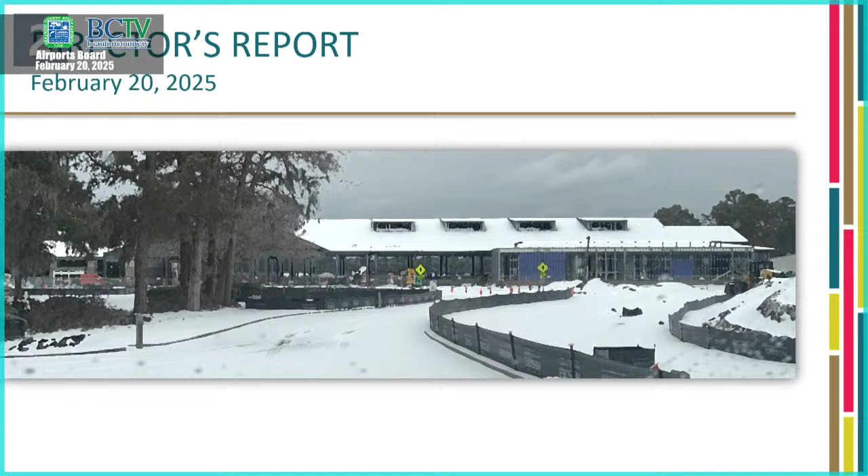Some new members: both Wesley and Joel are part-time firefighters at the ARF, and we hired them in order to try to reduce some of the overtime we have over there, because it's a 24/7 position with 2 folks on, and we end up running into overtime. So they're both actively employed by other fire districts in the county, but they were interested in coming over to us. They're just about through all their training, and they'll be ready to be full-fledged part-time ARF operators here pretty soon.

Just yesterday was the first day at work for Sandy. She is the 3rd member of our airport finance team. As we're taking more and more of that on at the airport, we need more people to help take care of that stuff. Sandy's going to be doing a lot of what Elena did before. Elena has moved up a position, and then we'll have Brian doing less of the day-to-day and more of the strategic, budget-related, project planning, outward-focused kind of activities that he's really gifted at. Happy to have Sandy there, I think she's going to be a great fit. We brought her in and let her see the budget yesterday, and she didn't run away screaming, so I think she passed that first test. Welcome to her, too.

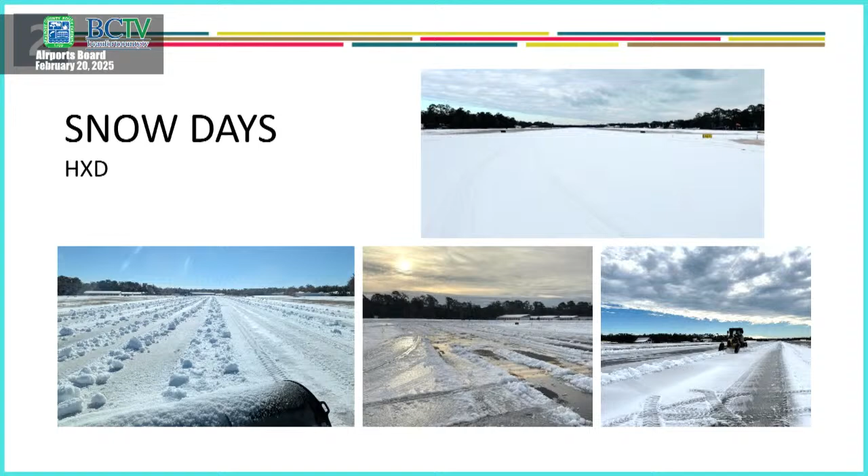So it's a little bit challenging, and it did give us a chance to think through contingency planning and what-ifing the scenario. We're not going to spend a lot of money and prepare for an event that may not happen for another 10, 15, 20 years. But if we find some product that has an extended shelf life, isn't a huge investment, and doesn't require a bunch of specialized equipment to apply, then maybe we look into something like that so we could prepare for an event.

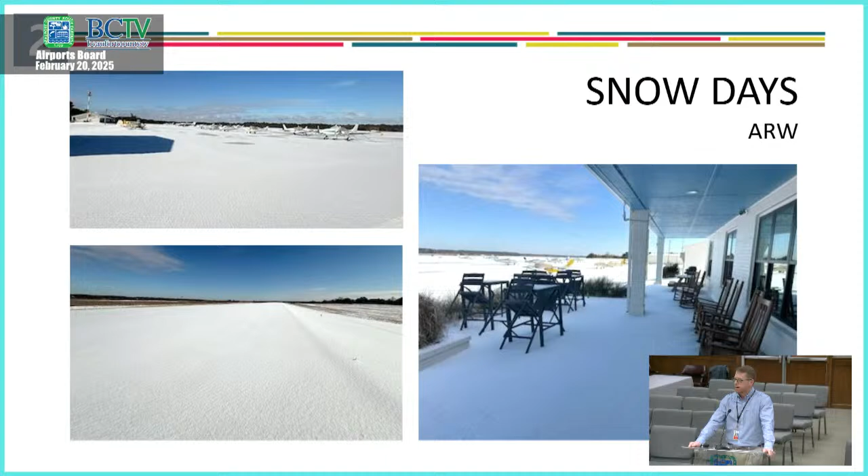There are pre-icing agents you can put down on runways and taxiways, but we'd have to look at the coverage, quantity, shelf life, all that good stuff. Because it just doesn't make sense to buy snow plows and snow throwers at an airport like this in this area — and you see that everywhere, nobody has it. Charleston cleared because they have the Air Force, and the Air Force relocated equipment since they don't keep equipment there either. So it's a challenge.

One question for you, John — do we know what the anticipated loss of revenue was for that 3.5 day closure? This time of year is luckily fairly low because the airlines only have a couple of flights. So I don't have a number, but compared to a hurricane during tourist season, this isn't much. So if we had to take one, we'd take this over a hurricane for sure. Yeah, and that was my assumption.

So just considering future investment, I mean, I would — yes, it's a once-in-a-decade event.

Yeah, it would probably take 3 or 4 events to recover to make that cost benefit work, I would imagine.

Does the airport have any de-icing equipment? Well, we don't, the airlines do. They do? Yeah, okay. And they use it a couple times a year. Yeah, they have to de-ice.

One thing you might want to think about, and it requires a little bit of investigation, is up north what they do is they have multi-purpose vehicles. In New York City, they turn garbage trucks into plows, so they're only used for plowing during a snowstorm, but the rest of the time they're used for something else. And some of those little bobcats you had around here, if you had something a little bigger, those machines can cut the grass and potentially plow snow at the same time, just by switching the attachment. Yeah, that's true.

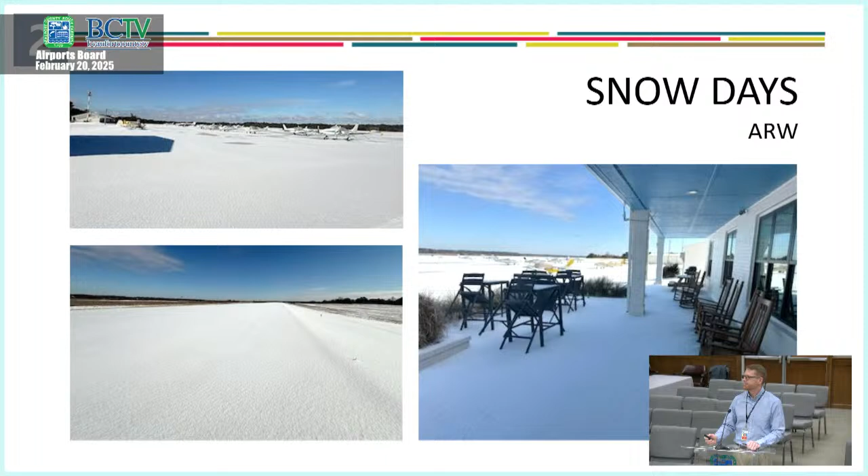So that was the snow. Hopefully everybody enjoyed it. The school kids did.

All right, so this is conference season. I think we say it every year, but February, March is really the big time for conferences. We had a couple of guys, our ARF chief and ops chief, go up to Atlanta a few weeks ago for the Southern Region Airports Conference and got all kinds of good information. Steve and I attended the State Aviation Conference last week up in Greenville, so I've got a couple of takeaways later in the presentation. Coming up in March is the Southeast chapter of AAAE in Charlotte, which I'll attend, and that same week I go up to DC to meet with airport directors and congressional staffs to talk about federal issues we're dealing with. So a lot of traveling going on.

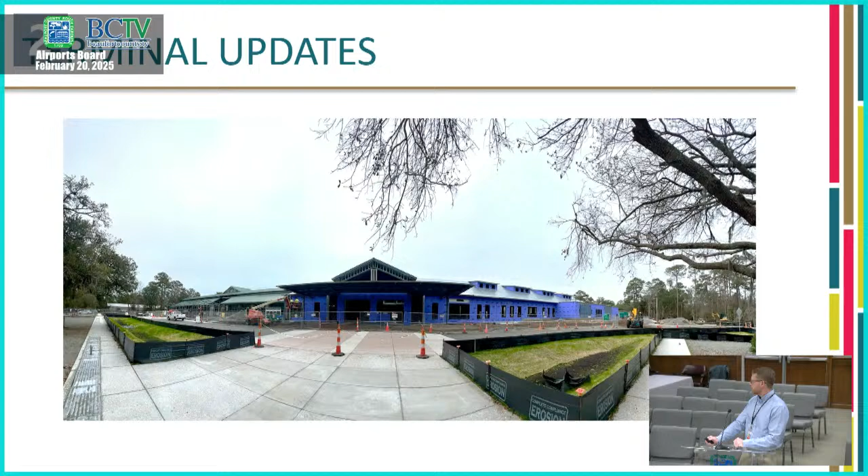All right, terminal updates. We've got a little slideshow to show you, so let's see if this thing works. There you go. All right.

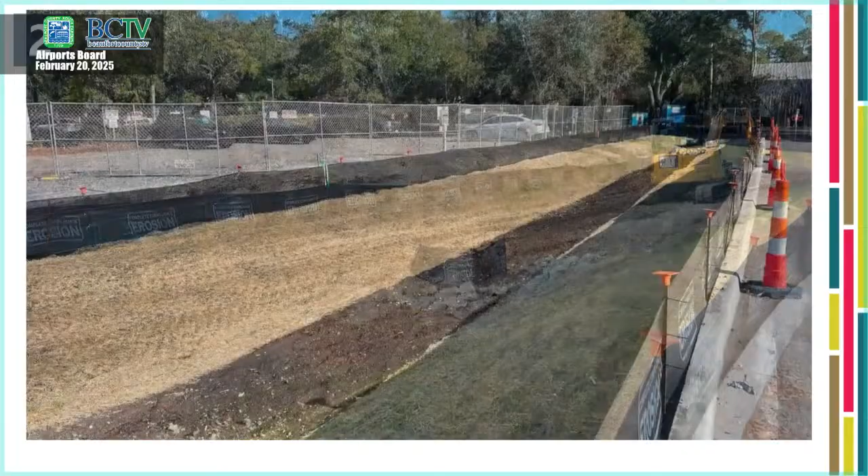So that shows kind of the progression, and that's only the last, probably about 5 weeks of progress. There's been a lot going on. The weather changed a lot during that time, we had snow, fog, rain, sun, fog again, but it's been going pretty smoothly out there. Things are looking good and it's just about dried in now. You can see where it went from not having any of the insulated board on the exterior to now having all of that up. The roof is almost completely paneled in, not the full decking and insulation yet, but that's all happening now. Then there's the canopy out front, a temporary canopy in front of the existing building under construction now, which should be done in a few more weeks. It's coming along really nicely and we're pretty happy with what we're seeing. So any questions on that?